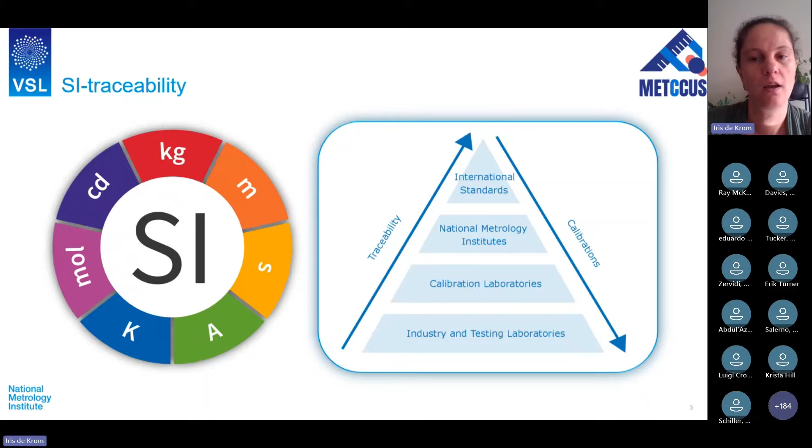And at the moment, for this, I am coordinating the metrology support for carbon capture utilization and storage project, or in short, MET-CCUS project. This project started the 1st of October 2022, and it will run for 3 years. So that means that we're almost halfway through the project.

The project is part of Euramet, and Euramet is the European Regional Metrology Organization, and their tasks are to make sure that national metrology institutes work together in fields such as research, setting up national measurement methods traceable to the international standards, and make sure that measurement standards are known worldwide and also within Europe.

So under Euramet, the MET-CCUS project is a research project where we work together with 21 participants. So different national metrology institutes, but also universities, research institutes, and industry. And in this case, we work together to set up a metrological measurement infrastructure needed for carbon capture or for the CCUS industry.

Before the project started, 4 measurement challenges were selected together with industry. The first one is flow metering. When you want to transport or store CO2, it's very important to know the amounts of CO2 that are sent into storage, and therefore you need very accurate flow measurements, which are currently under development in the project.

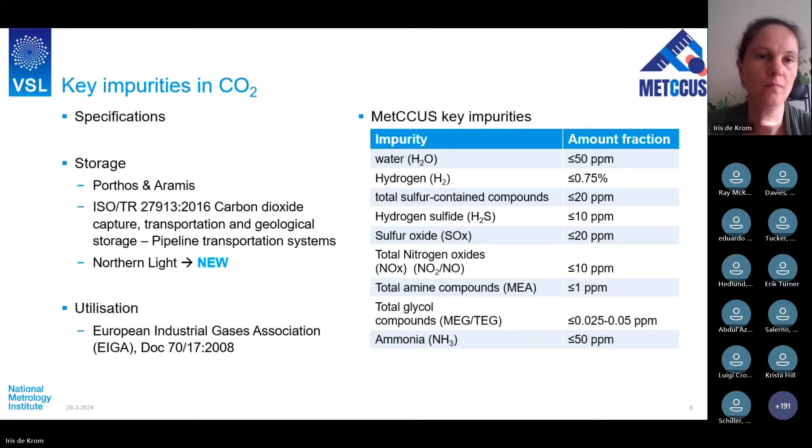So at VSL, we have two different ways to prepare reference materials. We do this by preparing static gas mixtures, which are gas mixtures in high pressure cylinders, containing one or more impurities in CO2 at relevant amount fractions. We also prepare dynamic gas mixtures, made from pure gases or already pre-mixed gases. We mix different streams together to obtain a final gas mixture, which flows through tubing or through a pipeline system.

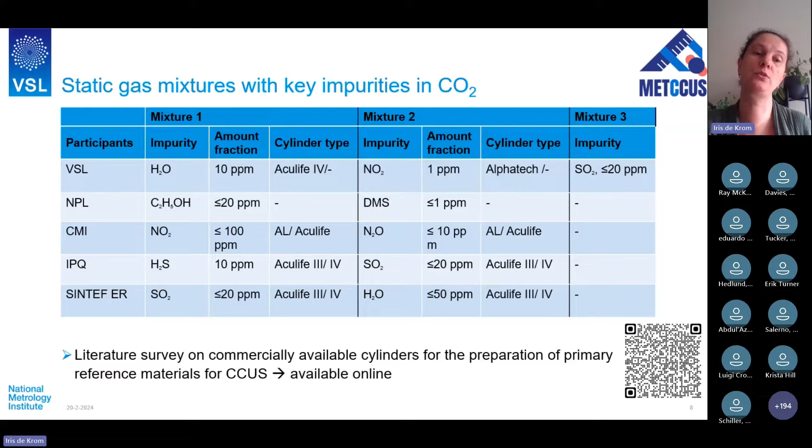Of course, it's not only important to have reference materials of one impurity in CO2, but also of multiple impurities in CO2. These are also prepared in the project by NPL, CMI, and IPQ, who prepare these types of materials in high pressure cylinders.

So they contain the permanent gases - think nitrogen, oxygen, methane, hydrogen, argon, even some CO - and next to that, also reactive impurities such as NO2, N2O, SO2. They're preparing these static gas mixtures and looking at the stability when combining all these impurities in CO2.

At VSL, next to the static gas mixtures I mentioned, we also prepare dynamic gas mixtures. For this, we use thermal mass flow controllers. Here we have a setup with 3 mass flow controllers, and we can connect 3 different gas mixtures to that.

We start with a mix of different permanent gases in CO2, and we mix those gases together, and we can add extra CO2 to dilute it further, or add CO2 with other reactive impurities to obtain different gas mixtures with different compositions, which can be directed to an analyzer or sensor for analysis or calibration of these materials. Currently we are setting up these methods.

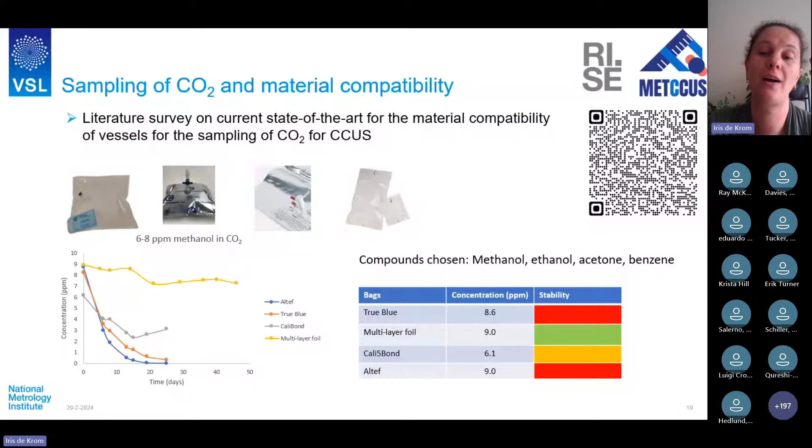Currently we are finalizing these measurements and writing a report about this.

We are developing these type of analysis and also calibration methods for these type of instruments in the project. Next to that, we also develop online analysis methods.

This is done by one of our partners, DFM, the Danish National Metrology Institute. They developed an online method for leak monitoring and CO2 purity monitoring based on photoacoustic spectroscopy. These methods are also very important to make sure that you can follow your CO2 stream online and see what the impurities are before you purify it, after purification, before you send it into storage. So these methods are also under development.

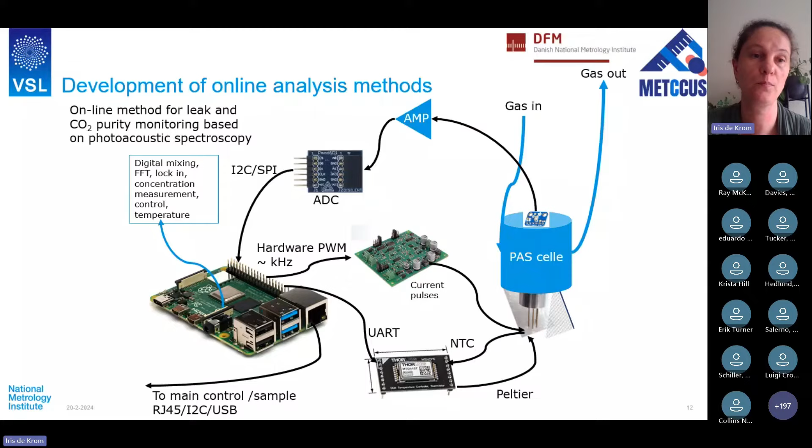So then in conclusion, currently in the MetCCUS project, we are developing primary reference materials with impurities in CO2, which can be used to calibrate offline and online instruments for CO2 composition measurements. We are looking into sampling methods and material compatibility. And as mentioned, we develop these online and offline measurement methods.

So with our results, we write good practice guides, literature reviews, and peer-reviewed articles. This is very important to support the development of documentary standards, specifications, and regulations to ensure safe and efficient operation of CCUS processes, and in the end for the industry to become carbon neutral and to overcome climate change.

So if you're interested to know more about the MetCCUS project, you can follow us online or you can contact me. And if you have any questions, I'm happy to answer them.

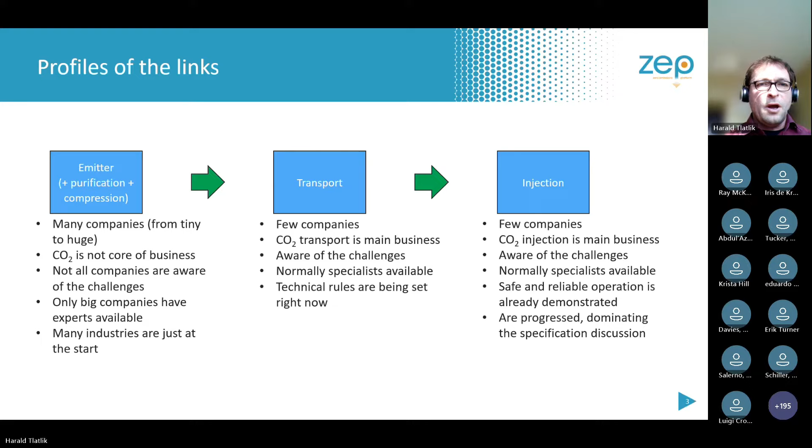What are the challenges and driving forces? Once more, looking at the middle and right box, and on the other side the left box. But the big bracket here is integrity and operability.

All of them need to address that. With operability, I mean, for example, flow assurance—if you have chemical reactions giving you a lot of solid bodies, you have a problem because your pipeline is simply stuck. Integrity is a corrosion problem, for example. It means a little bit different things for all of these boxes, but this is basically asking for a high purity.

But the rest is really different. On the transport and injection side, tendency-wise they want a high purity because that gives less problems, less costs, lower CapEx, lower OpEx. On the injection side, for example, the reservoir will just take a lot more CO2 in the end if you have fewer impurities.

On the other side, on the emitters, we have a lot—it's a lot less defined. It depends really on different industries how they emit their CO2 stream.

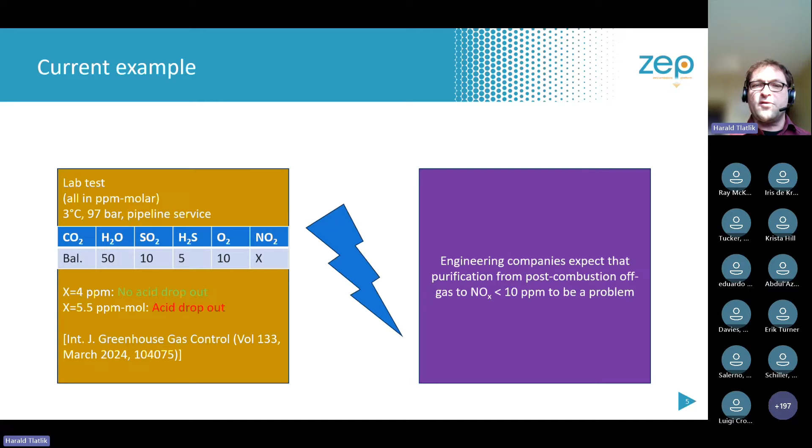Costs for injection and transport are moderate, but for the emitters they are pretty high. To give you a short number on CAPEX: take the Greensand project in Denmark, they want to inject about 100 million tons of CO2 until end of life. The investment would probably be something like 1 billion euros, maybe half of that, maybe 50% plus. If you divide that, you have 10 euros per ton of injected CO2, plus of course the OPEX.

So it gives you the idea. If you could add 100 million euros, for example, to make the whole project more resilient against corrosion or other problems arising from impurities, they would just add 1 euro per ton. On the emitter side, there are no good numbers, but I talked to several parties, and they expect something like 130 to 150 euros per ton of CO2 just for the purification and compression process.

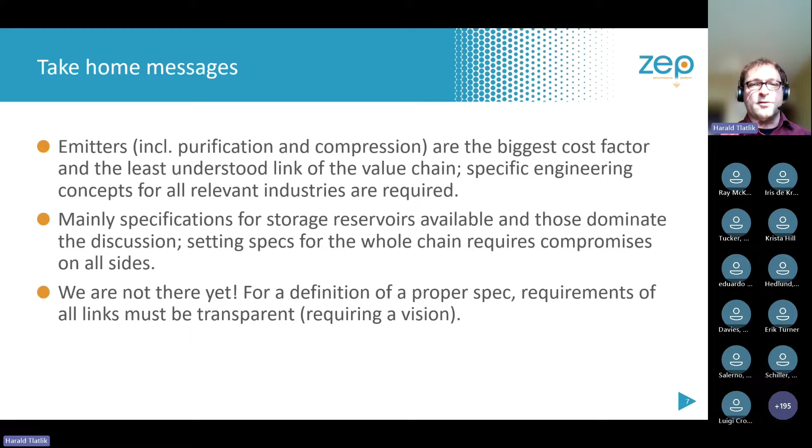I would like to thank you for your time, and if there's time, but I don't think so, I would be open for questions. Otherwise, we do that at the end.

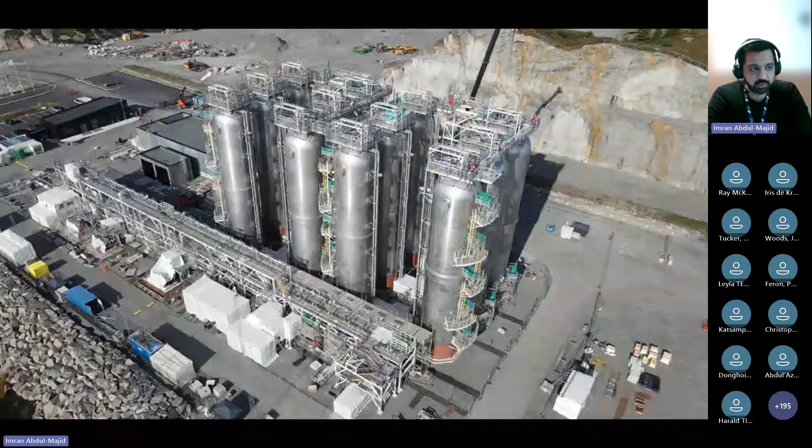However, the project itself was being worked up by Equinor for a few years before that. Sometimes pictures do come a bit short, so I have here a drone video to really show - I hope it's running - it gives you an impression of the plant and its state.

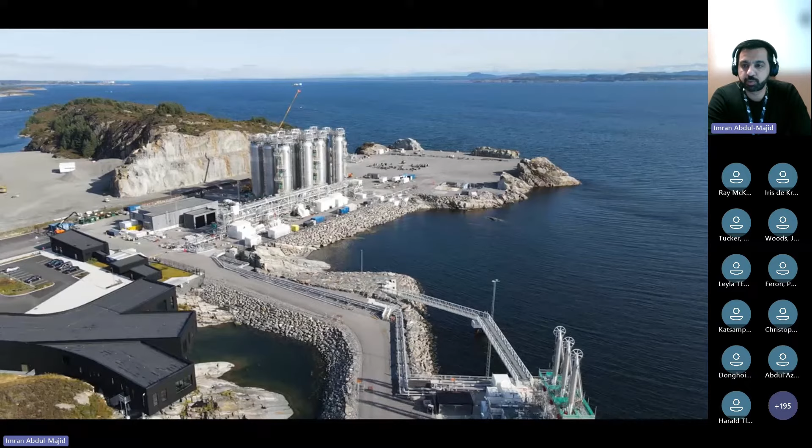We have built an open source, non-discriminatory plant, meaning open source, open vapor return is the design basis. Currently, the plant stands about 98+% completed. A major part of the plant is already commissioned, and we are working toward getting ready for receiving CO2 this year.

Aziz, was the video running?

Yes, it's running. Excellent, good.

I think one of the key things here is that it makes a difference when you try and test things in something that you actually are building. When you have steel in the ground, concrete and bolts, you are able to really assess the impact of what you are doing.

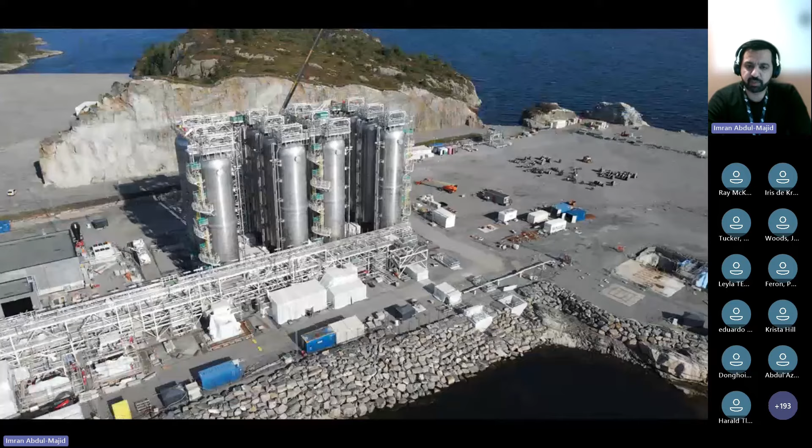When we started the Northern Lights project itself, roughly 8 years ago, the CO2 specification was very different with regards to the sources available, but also the experience available. Since the development of Northern Lights, a lot has happened, and that's why one of the older CO2 specifications needed to be updated. It's important to mention that when Northern Lights issued a new CO2 specification last week, it did not issue a specification for the industry. It issued a specification compatible with the facilities that Northern Lights has built, and that is quite an important distinction.

We have the transport solution, which is based on ships. I wanted to show you a couple of pictures to give you the idea. Our first 2 ships are under construction. They will be leaving dry dock this year, actually next month, and probably arrive in Norway by end of 2024. They are 7,500 cubic meter medium pressure ships, LNG fueled, wind assisted, air lubricated, so we try to make them as low in carbon footprint as possible.

In addition to those 2 ships, 2 additional ships have already been ordered. So ship number 3 and ship number 4 are also ordered, and the same yard will manufacture them. For the ship manufacturing in particular, we have Stasco, the maritime arm of Shell, as our technical service provider. For the plant you saw earlier in the video, our contractor is Equinor. The way we work is basically we contract out packages to owners and other companies to deliver pieces of the value chain.

The storage is located in the EL001 license. What you see on the right-hand side is the western coast of Norway. That's the 110 kilometer long pipeline. We are located just south of the mega Troll gas field, where we receive CO2 from the pipeline. We receive all our umbilical power, control, and hydraulics from an Oseberg A platform, about 40 kilometers southwest from us.

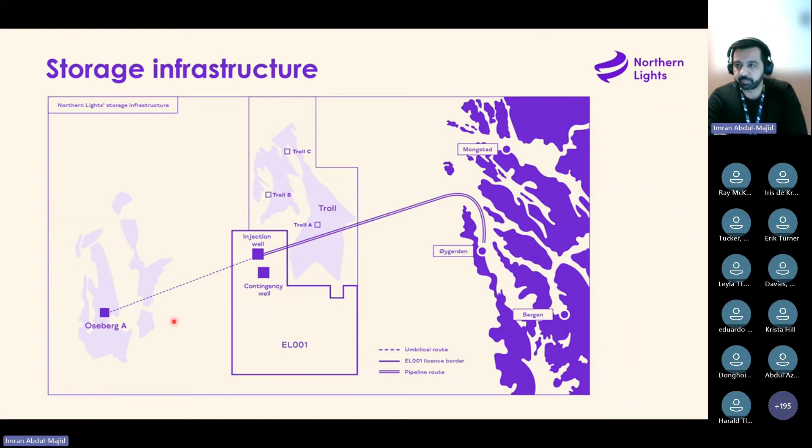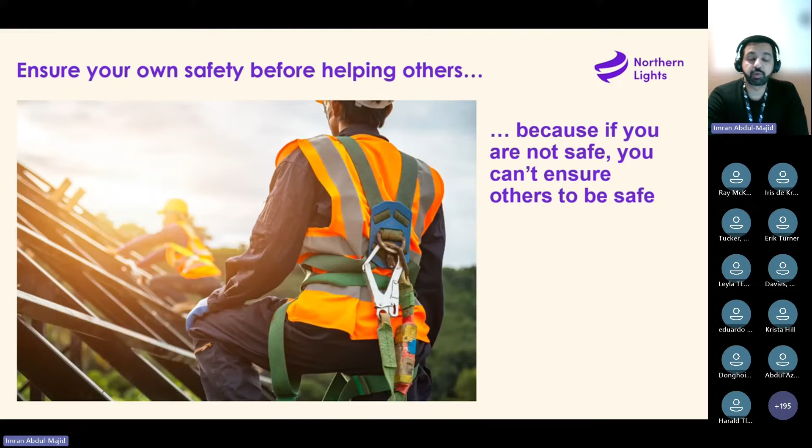You often hear this when you travel in a plane: ensure your own safety before helping others. Put your own oxygen mask on before you help others, because if you are not safe yourself, you're not able to ensure that others can be safer. This is really the mantra behind assessing the CO2 specification that was set 6-7 years ago for our design basis and infrastructure, i.e. Northern Lights. New insight shows that there was work demonstrating that corrosion and corrosive elements of impurities were not adequately handled, simply because at the time the specification was developed, they were not available.

About 12 months ago, we commissioned a CO2 task force and gave the role to DNV to lead it, to keep an independent body. We had interdisciplinary teams from Northern Lights, Equinor, Shell, Total Energies, and DNV participate in that task force, and we covered a significant range of topics.

We opened up the previous specification, which was also built by DNV, contracted by the state when it was first developed 8 years ago. We relooked at risks and operations, HSE, chemistry, thermodynamics, corrosion, material integrity, flow assurance, subsurface considerations in terms of plugging of the reservoir, marine aspects in terms of shipping, off-spec handling, process, and quality analysis. As you can imagine, this is quite a large range of topics that we looked at, with about 75 people who just finished the task force last month.

We actually have a webinar tomorrow on the new CO2 specification. The intention was really to take a critical, hard look at what we have, and then look at work available in the public domain, work conducted in joint industry projects, and work done in our owner companies, pulling it all together for a fresh view of what we have built, or are just about to complete constructing, and whether we have any insight showing that we are not safe. The specification has been developed based on the current built Northern Lights value chain.

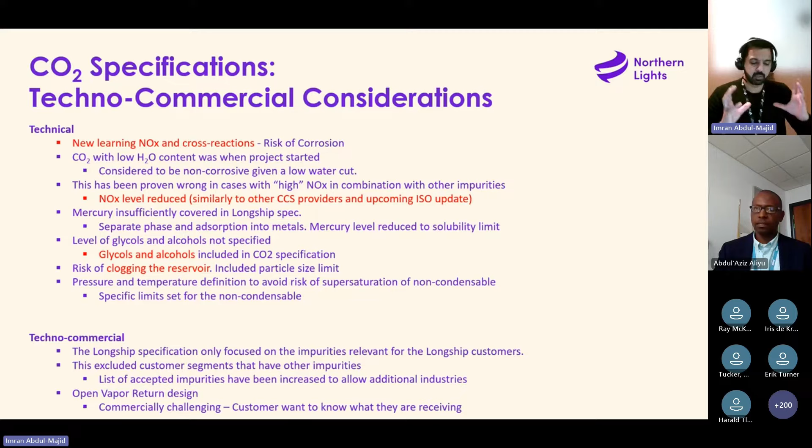These are the high-level technical considerations. Then we have techno-commercial considerations, which look at the previous specification we had. Remember, what we're building right now is a demonstration project, but on the back end of this, we will have a commercial phase.

The demonstration project is based on Longship customers, that's two-state customers. It did not include the segment of customers with other impurities, which is what I mentioned a few moments ago. There was a need to open it up and allow flexibility to host more customers.

We've also designed an open vapor return design, which is yielding a lot of commercial challenges with regards to how you actually handle a specification on both sides of the table. Do you not have a specification for vapor? Is that fair when you've actually built an open vapor return design?

So in the spirit of balancing safety and commercial aspects, there are now three key aspects. This is taken from the publication we did last week on our webpage with the new CO2 specification. We've really included new insight into cross-reaction between existing and new components that lead to the development of corrosive fluids - corrosive fluids being highly dangerous for our integrity. We've relooked at that and set a few limits to make sure we do not develop corrosion. That basically covers part 1 and part 2.

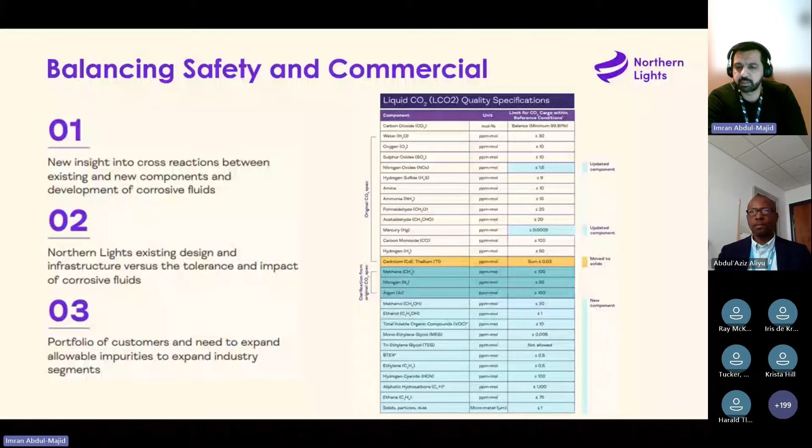On the right-hand side you see the specification table as published. You'll see both the old specification and the components that have been updated, what we moved from the old spec into the new spec, and the new components we added. For me, this is not really tightening it, but making sure the spec is safe, because safety of our people, the plant and asset is paramount.

It's literally no point venturing into this if we do not take on new insight. I wanted to show you this because it's not a piece of work done in isolation. It's work we've focused on the value chain. The beauty of Northern Lights, humbly saying, is that when we develop something we actually have the chance to test it. We have metal, steel and concrete on the ground.

We have a value chain that is almost ready, and a customer portfolio with a significant number of customers spanning a wide range of industry segments. That means we can test these things quite deeply and understand where capex is pressuring, and where operability is pressurizing.

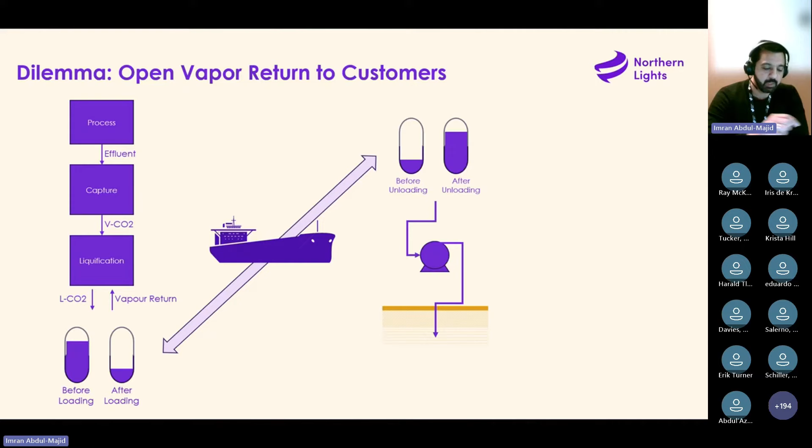And this was really my last slide. I hope I haven't overdone it on time, Aziz.

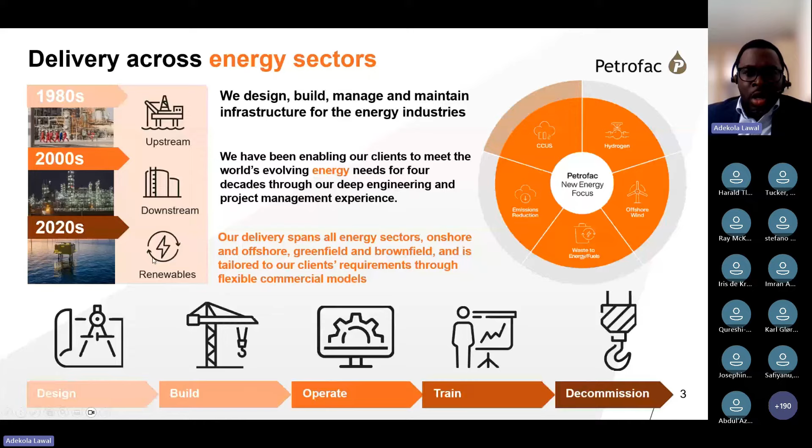One additional unique offering is that, based on our involvement across the entire project lifecycle, we are able to bring perspectives from various stages to early front-end engineering studies, because we are involved across the project lifecycle.

So here are some of the projects that Petrofac is currently delivering in carbon capture, utilization, and storage. The first one I'm going to talk about is an EPC project, which is currently in development in the UAE. Here we are looking to triple ADNOC's installed capacity for carbon capture to 2.3 million tons per annum. The project itself is about 1.5 million tons per annum.

And basically it's a full scope CCUS project. So it's a natural gas processing plant, and we basically separate the CO2 and condition it, transport it, and inject it back into a geological formation.

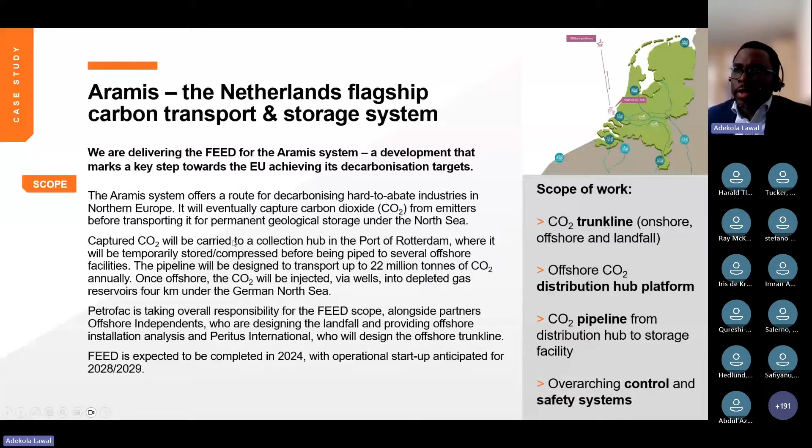The next project I will highlight is a FEED project that we also conducted in Stockholm. This is on a bio cogeneration plant in the Stockholm area, and we have concluded a FEED on this particular CCS project in Sweden.

This would potentially deliver negative emissions of CO2 because it's a biomass cogeneration plant. Once you've combined that with CCS, you have the potential to deliver negative emissions of CO2.

Petrofac's scope of work included the PDP for the capture process, and also the CO2 compression, dehydration, liquefaction, on-site storage, and preparation for onward shipping of the CO2 to the final storage location. So that gives you a flavor of the kind of project that we've been involved in.

I just thought it's helpful to take a step back and look at the CCUS value chain. We have a representation here. We have various approaches for CO2 capture: post-combustion, pre-combustion, oxy-fuel, industrial processes like cement and refineries, direct air capture. These will basically deliver CO2 at different conditions, different pressures, and with different compositions and contaminants, and that's one important factor to take into consideration.

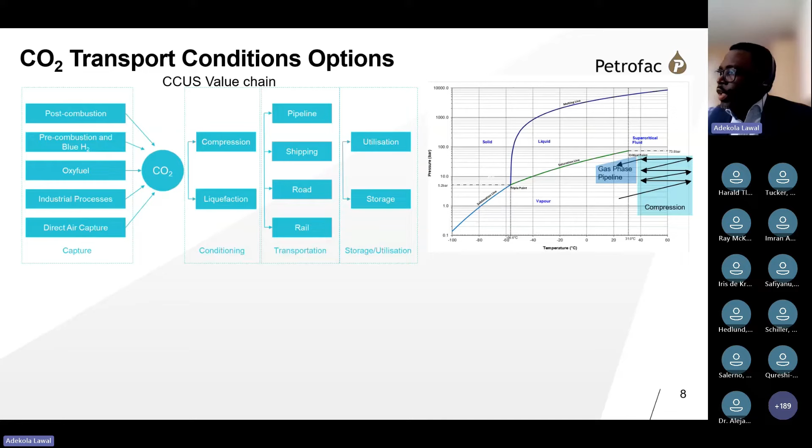So for example, compression, you might have a gas phase pipeline. Why would you want to go for a gas phase pipeline? It's low density, usually larger diameter pipelines for effectively the same mass flow rate of CO2. You might be constrained because you want to reutilize existing facilities like existing pipelines, and you don't have sufficient bandwidth to accommodate high design pressures with some of those pipelines. So that might be one reason why you go for such a gas phase pipeline.

Otherwise, it's typically more efficient cost-wise in terms of the size of the pipeline to transport via dense phase. That just requires additional compression, obviously.

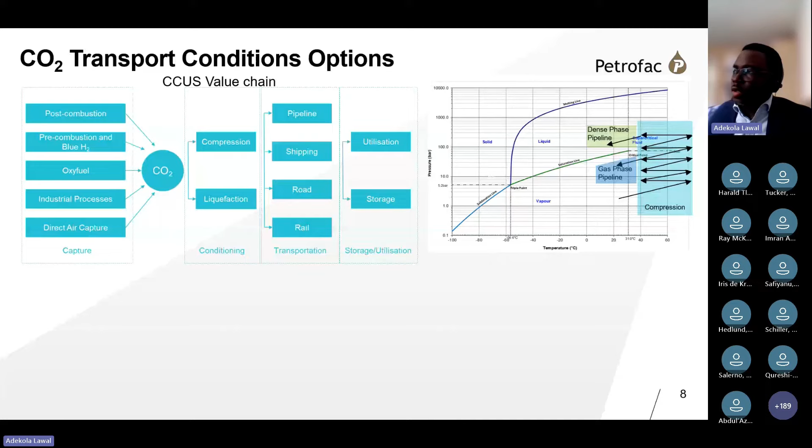Now, the additional conditions that you could transport CO2 in is liquid form, and there are various approaches: high pressure, medium pressure, low pressure. Medium pressure is the typical commercial option, and that's what Northern Lights application is currently using, and what a lot of commercial projects are considering as well. There are some conditions and unique features of each of those options.

As the name implies, there's a trade-off between how much you pressurize the CO2 and what conditions you need to liquefy at. At higher pressure, you don't have to cool the CO2 down to very low temperatures; you can achieve liquefaction at higher temperatures, and vice versa at low pressure. So just to set some context and some background.

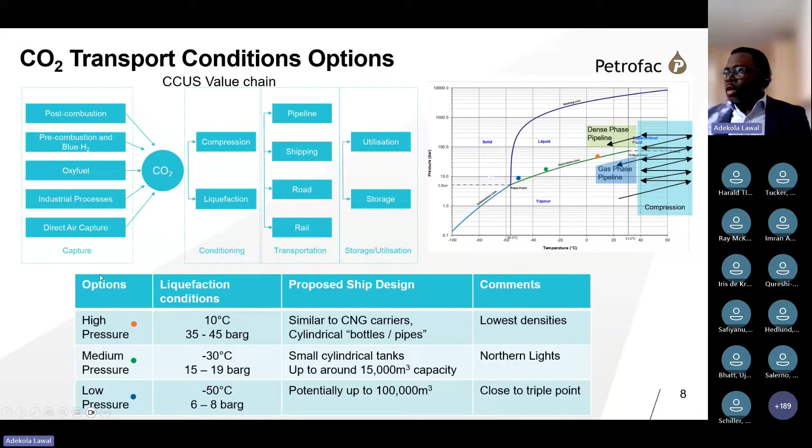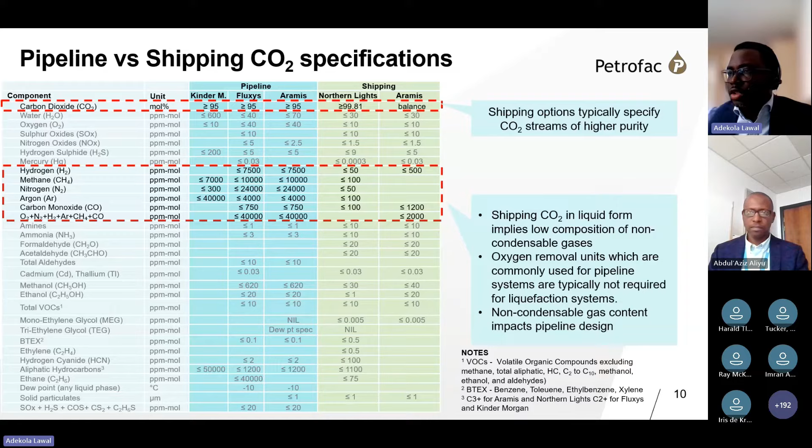Now, specifically on CO2 dehydration and corrosion, a number of speakers have alluded to the fact that corrosion is very important in CO2 transportation. The presence of free water is definitely something that should be avoided at all costs, as free water can lead to extreme corrosion rates, hydrate formation issues, ice formation issues, and the like.

So it's almost standard across the various transportation options that you would have some form of dehydration of your CO2 streams, using technologies like molecular sieves, silica gel, and TEG. It's important to note these achieve different levels of dehydration. Also, TEG itself is one of the impurities with significant or stringent specifications, because it has an impact in increasing the water dew point specifically. That's one point to note about TEG dehydration.

Other key contaminants - and I'm coming to the end of my slide pack - there are a number of additional contaminants that increase the risk of corrosion. Oxygen is one of them. Nitrogen oxides and sulfur oxides also present quite significant risk for increased corrosion.

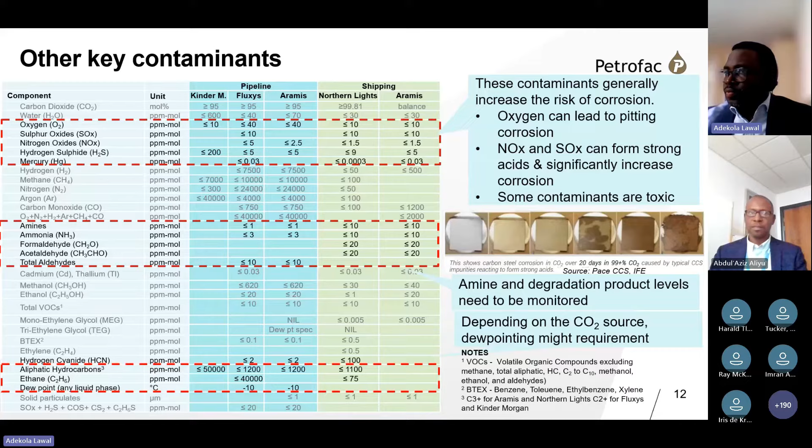So thanks for your time, and yeah, I don't know if you have time for questions.

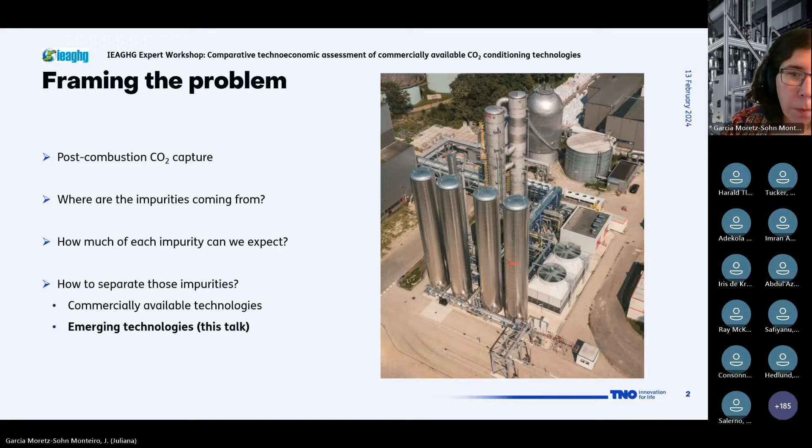There are two campaigns from TCM, Technology Centre Mongstad, that have addressed CO2 quality out of the stripper, and I will refer to these two campaigns here. They were both operated with MEA, so open campaigns with an open solvent and with different flue gas qualities.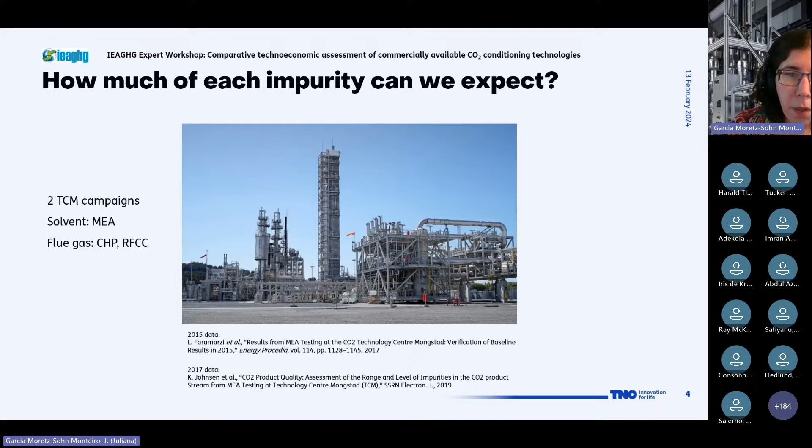What we see from the campaign from 2015 is that there are, for instance, aldehydes in the CO2 product at ppm levels, formaldehyde, acetaldehyde. MEA, the amine itself, was also found, at least 0.03 ppm, and diethylamine, a degradation product of MEA, more at the ppb level. In the 2017 campaign, they extended this test to more components, also looking into oxygen, argon, nitrogen, CO, and NOx, and here we see more components coming through and appearing in this CO2 product.

We're talking about ppm and ppb levels here, and throughout this workshop people have already addressed difficulties with measuring these components. We can imagine that, for instance, for NOx, this is already a challenge, but it's also very important to measure so that you know how to further process the CO2 before it needs to be liquefied or sent to pipeline and so on.

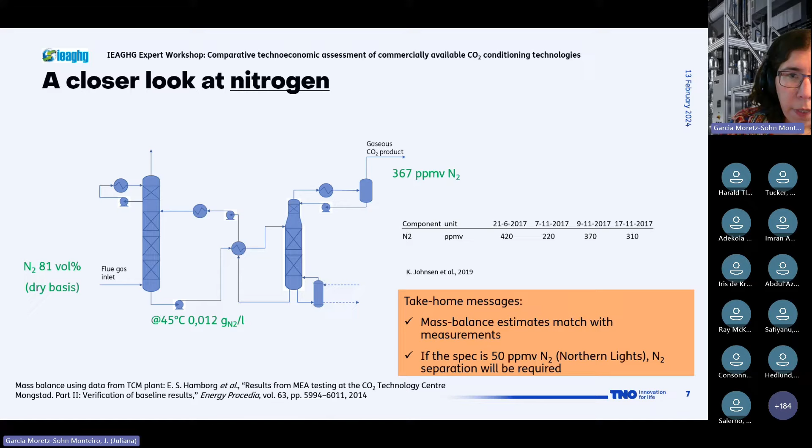With the same line of thinking, we can look at oxygen. If I do the same exercise, I end up with 73 ppm of oxygen in the gaseous CO2 product. I also include argon here, 8.7 ppm, because in the measurements taken at TCM, oxygen and argon are reported as a lump sum. If we take the sum, what I've calculated is around 80, and what is measured is quite below this, like 2 or 3 times lower than what I actually estimate with this mass balance.

But this is actually expected because, contrary to nitrogen, oxygen is not inert in the solvent matrix. It is known that oxygen reacts with the solvent and forms oxidative degradation products that we were talking about, like ammonia, aldehydes, ketones, and so on.

At TNO, we're busy doing measurements of how fast oxygen reacts with solvents at different temperatures, different CO2 loadings, and so on. Using those measurements for MEA, I come to a certain expectation of how much oxygen would be consumed in my plant. If I do so, I end up with 0.68 ppm of oxygen in the gaseous CO2 product.

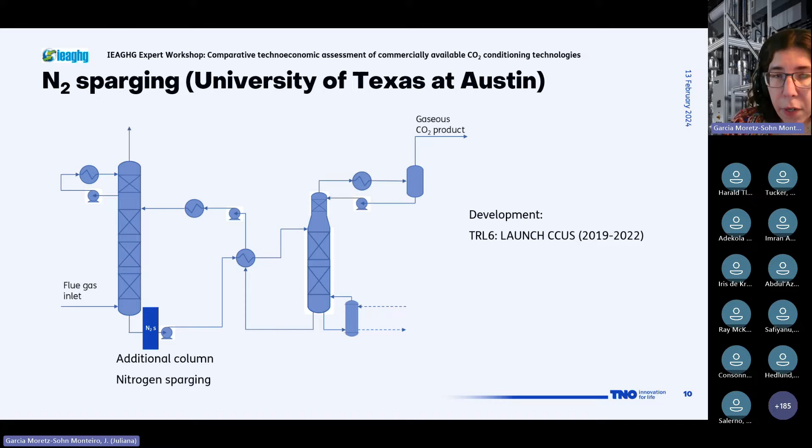They have demonstrated in their pilot at the University of Texas that up to 90% removal can be performed. Gary's group also worked out, for a feed study, the design of a full-scale plant for 460 megawatts of a natural gas-fired power plant, and worked out the economics of the solution, coming to a cost of around $0.25 per ton of CO2 for having this nitrogen sparging column, with most of the costs coming from having the nitrogen plant in there. So this is, I would think, not a very major cost, and if we factor in the advantages of lower degradation, then this sounds quite reasonable.

The technology that we at TNO are working on is slightly different. It's called DORA. The thinking is the same, so we also want to separate out the oxygen in the rich solvent line, but instead of with a column, we do that with a membrane contactor. On one side of this membrane contactor, our solvent is flowing through, and on the other side, we use a combination of vacuum and nitrogen or CO2.

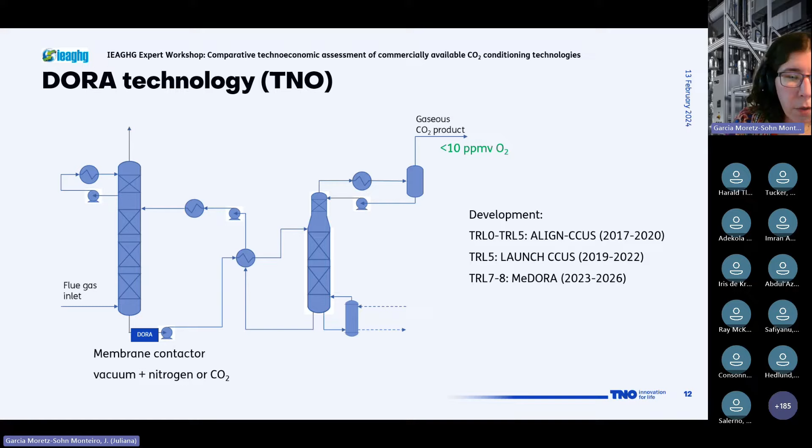By designing it as a membrane contactor, we can definitely lower the amount of sweeping gas, the nitrogen that is used. And by doing that, we can also lower the costs. So this is a technology that is currently under development.

We have already demonstrated up to 90% removal at TRL 5. This is a skid that is installed in an incineration plant here in the Netherlands. In preliminary comparison to nitrogen sparging, we see possibility to lower the capex and opex, but also not only separate oxygen, but also nitrogen.

So the take-home message is that both DORA and nitrogen sparging are effective in separating oxygen, with more than 90% removal demonstrated. With these technologies, we can also separate other trace gases from the amine stream, like ammonia, NOx, and so on, increasing the CO2 quality from that perspective. The costs are expected to be in the range of 25 cents per ton of CO2 or lower, and the environmental impacts need to be further quantified.

This is the objective of the MeDORA project that we're currently running. It started last year and will run for 3 years. We will demonstrate the DORA technology in 3 different pilots with 3 different solvents, at 20,000 hours of operation in total for the technology.

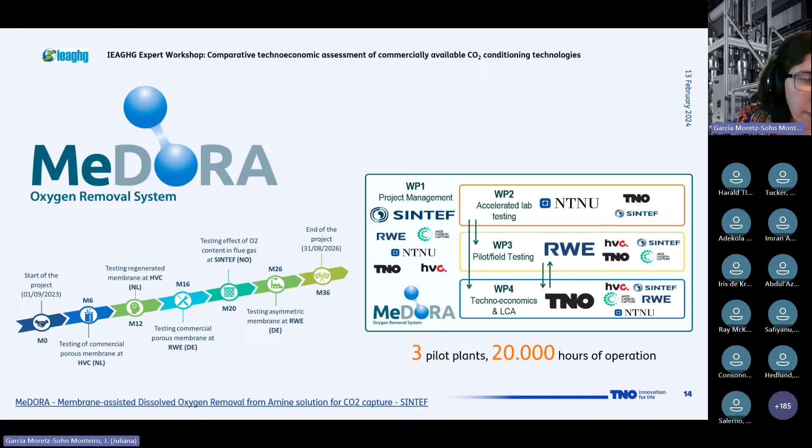With that, I would like to thank you all for your attention. I guess there's no time for questions, but we'll have that at the end of the session.

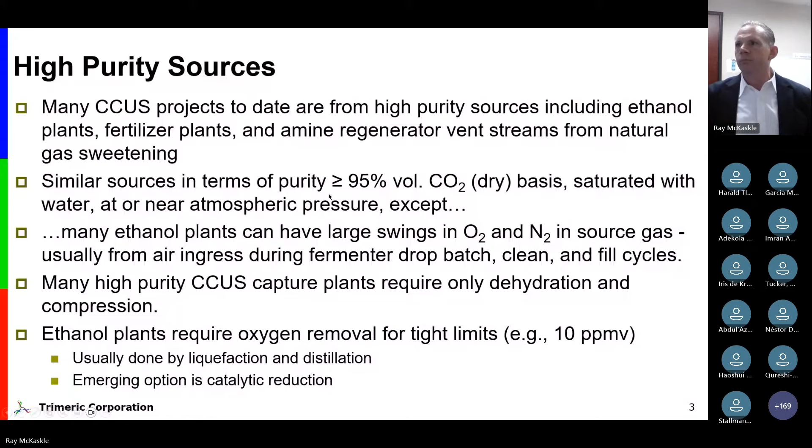While a lot of high purity capture plants can get by with only dehydration and compression, ethanol plants typically require either liquefaction and distillation, or some other way to get the oxygen down below a tight limit like 10 ppm. This is an example of a project Trimeric did about a decade ago at Coffeyville, Kansas,

where there's a pet coke gasifier that uses Selexol to clean up the syngas. It removes the H2S first, and then the CO2 that was previously vented to the atmosphere. We put in this facility that had about 20,000 horsepower, or 15 megawatts, of compression equipment: 4,000 horsepower reciprocating compressors, fed first by two 1,500 horsepower each multi-stage centrifugal blowers.

A lot of people would wonder why we didn't use a single integral gear centrifugal compressor for this project. It would be another good candidate, but the delivery time was over twice as long, and that was not acceptable to the customer. The oil field had to run at half of the injection rate for the first year, which is difficult to do without recycle in a centrifugal compressor. And if you just have one machine, those centrifugal compressors are highly reliable, but the customer wanted to have multiple pieces of equipment for redundancy.

Another source of CO2 is from hydrogen, from steam methane reforming and similar hydrogen manufacturing processes. What I want to highlight about this slide is that it depends on where you capture the CO2. At the furnace, the steam methane reformer furnace, you can get 100% of the CO2 generated in the process, but by then it's diluted down to about 14 volume percent, and it's at atmospheric pressure.

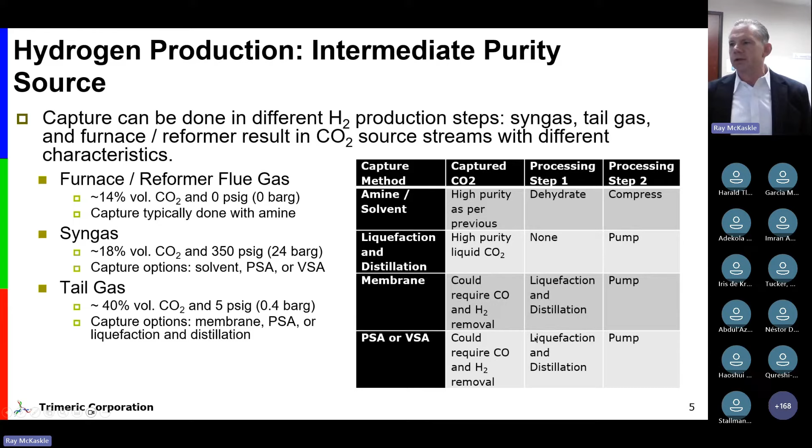When you get into flue gas, it's a lot tougher. Now you're dealing with maybe 10% CO2 instead of 95% CO2. A lot of these power plants run on intermittent cycles like peak loading or curtailment when the power load is low, and that's very problematic for a lot of capture technologies. As the fuel gets heavier, the particulates, the sulfur dioxide, the NOx, all of that gets worse, but the concentration of the CO2 gets higher. So even though it's a lot more challenging to do capture, there's still interest building for these hard to abate sectors.

Most often the flue gas is too hot for capture technology, so a direct contact cooler is used to cool the gas down. A lot of times they add caustic to the solution, which helps reduce any residual SO2 that's there. And sometimes they'll do a rotary gas-to-gas heat exchanger to try to do some heat integration and reduce the cooling water requirements in the DCC.

Before we move on to capture, I just want to emphasize that anything you can do upstream in the generating facility to purify the flue gas is very helpful to the CO2 capture process. So preventing air in-leakage or ingress at ethanol and power plants is a key thing. And power plants that are typically looking at capture have a lot of pollution control equipment already. They could be doing additives for mercury control upstream of the boiler. There's usually NOx control with selective catalytic reduction and/or SNCR, selective non-catalytic reduction.

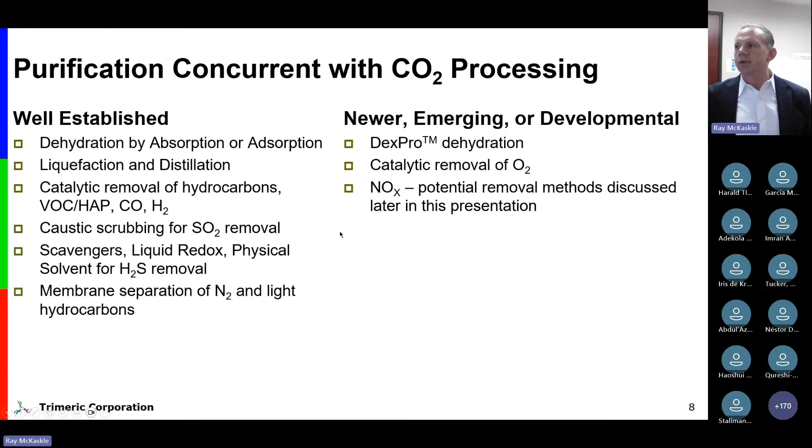So purification that's done after capture, concurrent with the CO2 processing - we're going to talk about some well-established technologies: dehydration, liquefaction and distillation, some catalytic removal of hydrocarbons. We'll talk about the idea of trying to use that to reduce oxygen. Caustic scrubbing, we'll have one slide on that. We'll touch on the different levels of H2S removal that you might consider, membrane separations for nitrogen and light hydrocarbons, and we'll talk about some newer things like DexPro, which is a Joule-Thomson CO2 recycle refrigeration dehydration technology, the catalytic removal of oxygen, and then talk about NOx. What's out there? What are we going to do about that?

And then this is an example of a plant Trimeric was hired to help that had some original design differences than we would have chosen. So they had a carbon steel tube sheet on the heat exchanger in a condensing CO2 service. And so we replaced this heat exchanger with all stainless steel for all of the wetted parts of the heat exchanger. So it's important to get the CO2 dry.

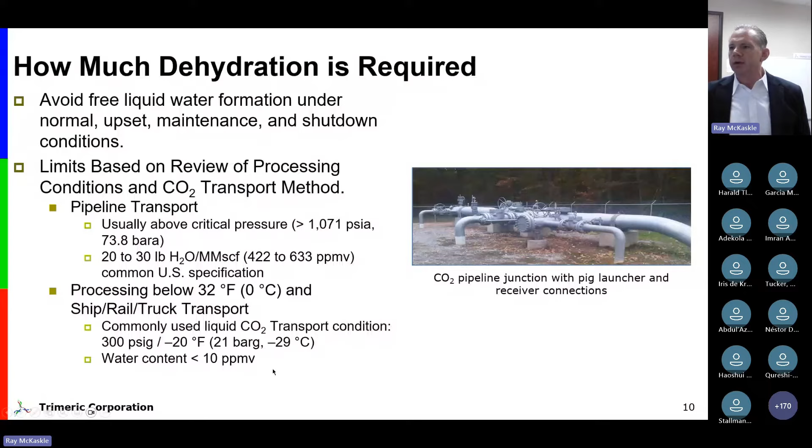And then the question is, how dry do you need it to be? In the pipeline in the US, again, as Wayne pointed out, it's mostly naturally occurring CO2 without a lot of other post-combustion impurities. So 400 to 600 ppm is a specification limit, but the dehydration equipment typically runs much better than that, somewhere around 150 to 200 parts per million by volume. But if you're going to transport liquid, then you have to dehydrate the CO2 to bone dry conditions, usually less than 10 ppm by volume, sometimes as low as 1 ppm, depending on how good your adsorbent system is working. This is an example of a pipeline from one of our EOR customers where it comes up above the ground.

Here's a comparison of the dehydration technologies and roughly how effective they are. And so just by cooling and compression with air or cooling water, you can get it to 50, maybe 40 pounds per million standard cubic feet. The Dexpro process is limited to about 30 pounds per million because of that hydrate condition. They can do methanol injection to get a little bit drier than that, but that's a practical limit with that approach.

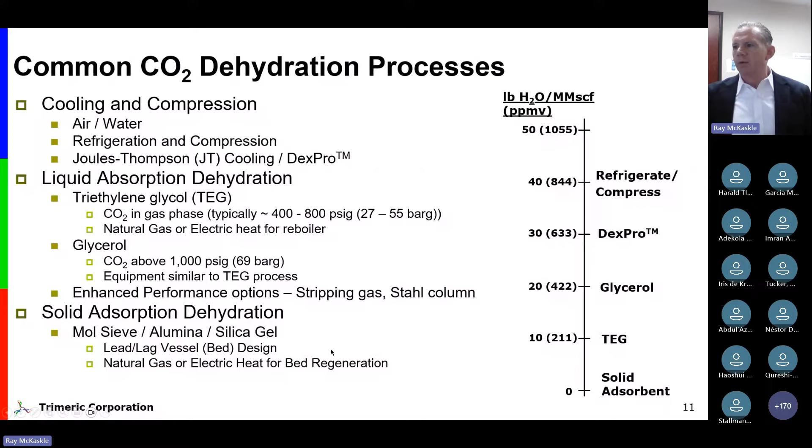So it usually works where you're blending into a pipeline where other sources of CO2 that are drier than that are already present. Glycerol is used when you're above the critical pressure for CO2, where the triethylene glycol would be too volatile and you'd have too much losses of TEG into the CO2. Otherwise, it's fairly similar. There's some tricks you can do to improve the performance of these absorption units, but they're not very common in the field. And what is common, if you really need it dry, is to use dry beds, mol sieve alumina silica gel with lead lag vessel design. You have choices about where you put your heat in, whether it's electric or natural gas.

This is a project that Trimeric worked on at the ADM facility in Decatur, Illinois. It was the first project that captured CO2 from an ethanol plant for an underground storage test. We injected 1 million tons over 3 years from 2012 to 2014. This unit cost about $600,000 purchased equipment cost, and it ran about 170 ppm on average over the 3 years of data that Trimeric was monitoring the system.

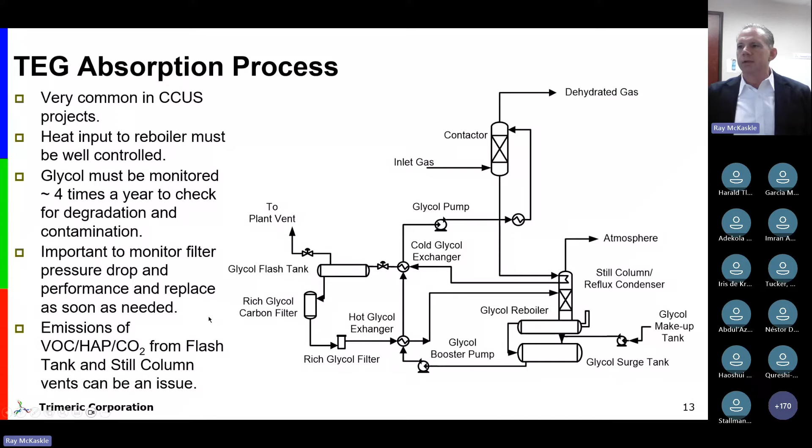It's also important to keep your glycol clean and keep your filters in good condition. Now, the dry beds are fairly simple.

You have some drying beds, the gas flows down and becomes dry, and then you're heating another bed or more to liberate the water. That regeneration gas can be recycled back to the inlet, or in some cases, it can be vented to the atmosphere.

This is more expensive, maybe 1.5 times the cost of the absorption units. So you wouldn't do this unless you had to, but if you have to, it's fairly reliable.

One thing it's important to do is to make sure you keep any liquids out of the drying beds, or it will damage the media. So we often have a superheater exchanger before this to heat up the gas by 10 degrees Fahrenheit or so to prevent any condensation.

Impacts of oxygen - this has been touched on a little bit earlier, but it makes a mixture of CO2 and water much more corrosive. The 10 ppm limit in West Texas, I've been told by operators out there, was a compromise. In fact, they don't want any oxygen.

Because they're circulating that fluid over and over again. Other issues - you can have biological growth in the formation, you can oxidize your dehydrating solution, and you can have subsurface reactions with H2S to form solids, which of course could be problematic.

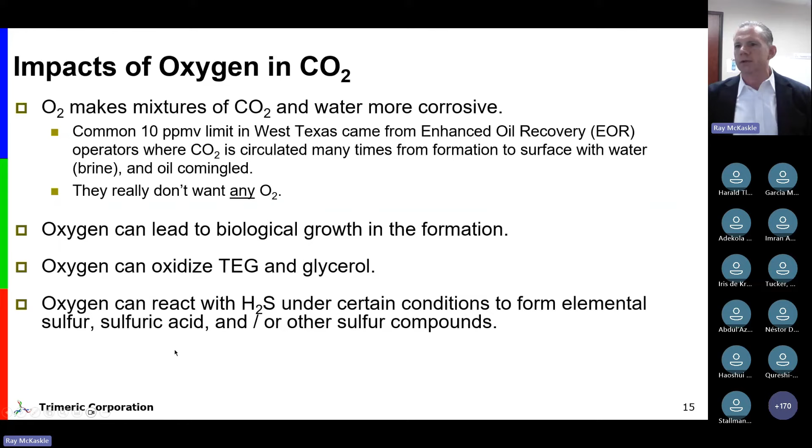The tubes were plugging up every time they started a new run because they hadn't dried the CO2 first. So we had to have them replumb to take the CO2 after it had been dehydrated.

But you're basically liquefying all the CO2, pumping it to a distillation tower where nitrogen, hydrogen, CO, things like that will go out the top, and you'll have a very pure product coming out the bottom. This is how beverage grade plants work, with a few more purification steps.

So the emerging option that we're hearing a lot about is using a catalyst. You need some water for the reaction to take place. You have to add fuel. You have to heat it up to very high temperatures compared to other CO2 processes, somewhere around 700 degrees Fahrenheit.

You have to think about the fouling potential of the catalyst because the catalyst is very expensive. And you have to think about how you're going to spare that and replace it.

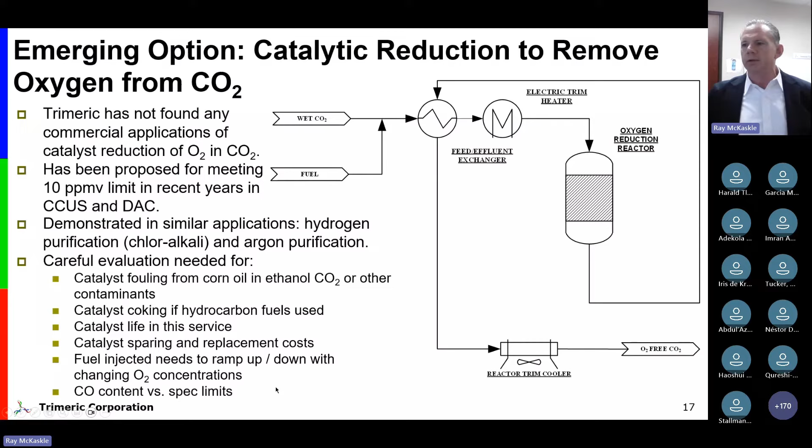And if your oxygen level's changing, you're going to have to be able to change the fuel feed rate as well. Otherwise, unless it's hydrogen, you're going to make CO. So you have to be looking at your carbon monoxide limit versus the specs.

If you're dealing with VOC, which doesn't come up that often in CCUS, but it does a lot on enhanced oil recovery, again, where they're circulating those fluids, you can use things like oxidation catalyst, which is done in beverage grade plants, or low temperature separation plants, which condense the CO2 and let the lighter hydrocarbons go overhead.

You can use extractive distillation for problems like ethane and hydrogen sulfide that have similar boiling points to CO2.

You can also use membranes. This is for an upstream natural gas sweetening application where it's going to remove nitrogen. Also, it can recover natural gas liquids.

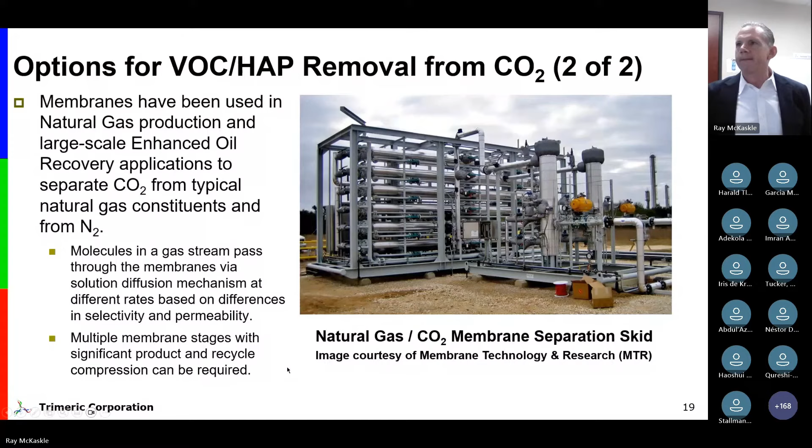This probably has limits. If you feed it too much SO2, you're going to have very high caustic consumption and wastewater disposal issues. H2S, we all know, is toxic and corrosive.

There's a lot of factors in choosing your H2S technology. Primarily the sulfur loading - how many pounds of sulfur a day is what you really have to think about.

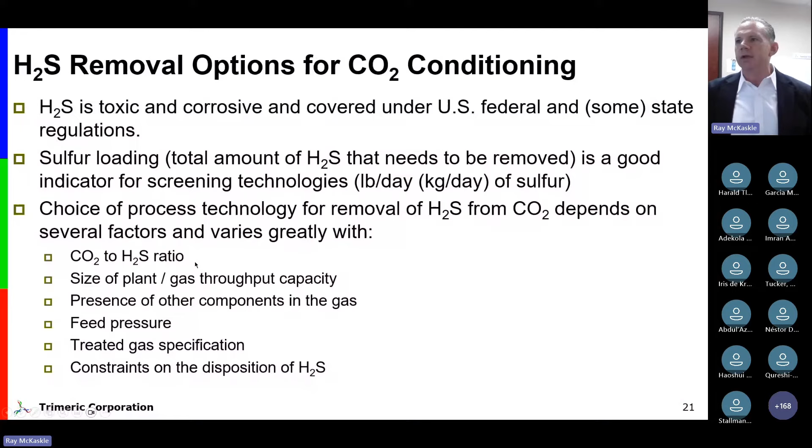If you're lucky and you don't have too much H2S loading, you can use scavenger beds, which have to be replaced. But if your sulfur loading is too high, you might be forced to do a liquid redox reaction like SulFerox or LO CAT, or Stretford.

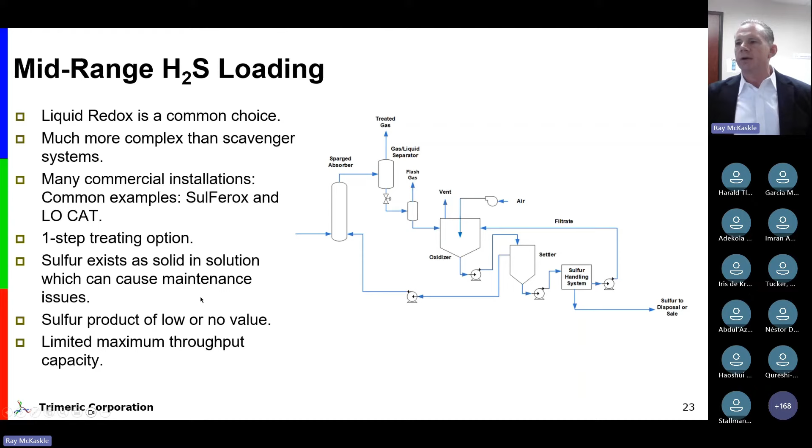These are very touchy processes. You have to have people that are well-trained, equipment in top shape, carefully monitored to avoid problematic issues like foaming.

If you have a lot of H2S, then you're going to have to do something else like amines, physical solvents, special types of distillation. You're going to have a rich H2S gas stream that you've got to do something with. You might be able to do acid gas reinjection, or maybe you'll have to do something like a Claus plant.

So NOx, the elephant in the room. This is a post-combustion product in most cases. It's a criteria pollutant. NO and NO2 are toxic, corrosive. They're very different gases. As has been mentioned earlier on transportation pipelines, there's been some experiments that have shown that even less than 10 parts per million or even less than 5 parts per million of NOx can lead to some corrosion issues, especially if there's SO2 or sulfur oxides present as well.

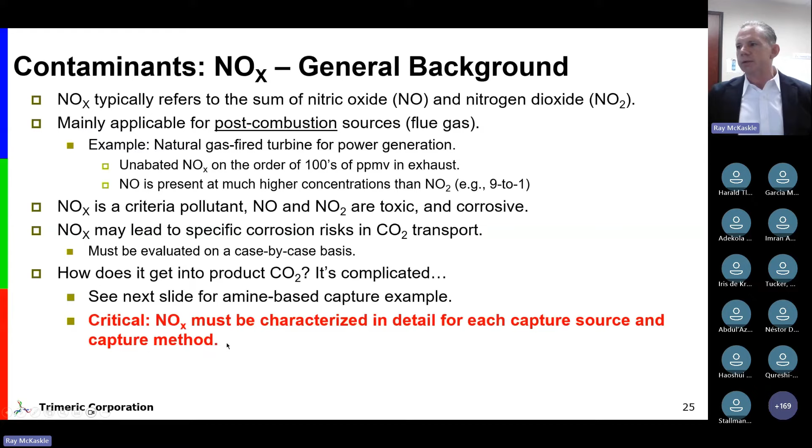So you've got to carefully characterize what's in the flue gas and what is happening to it in the capture method. This is a typical example. If you've got NOx in the flue gas, the NO2 is going to react with the amine. It might make nitrosamines or heat stable salts, which chew up the amine. It has to be replaced. NO is less soluble and probably will end up in the CO2. But once you get that NO2 here in the absorber, then you have to wonder how much of it is going to get stripped out with the CO2 that didn't react with the amine, and also what's going to happen to it later when compression and cooling cycles go.

So for NOx management before capture, you can try to manipulate the combustion conditions to cool the flame and reduce NOx. You can use selective catalytic reduction, selective non-catalytic reduction, or a combination of the two. This is a very hot process, 400C, 700F minimum, and that's a lot hotter than we typically process CO2. So if you're going to try to do that, you need some oxygen for that reaction. So then you're going to have to get rid of that oxygen afterwards.

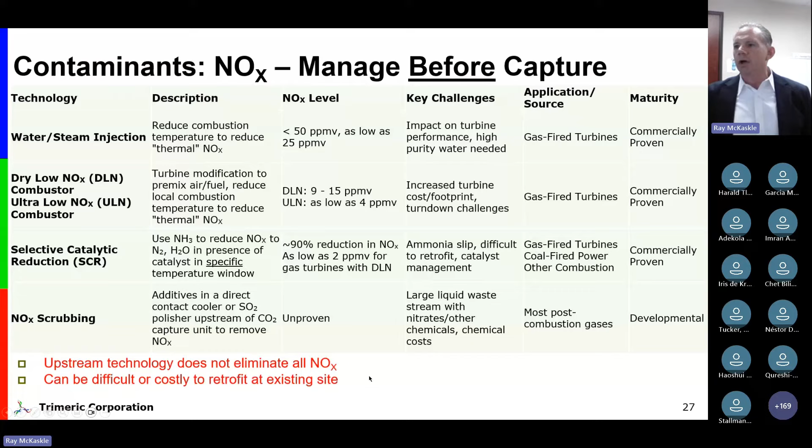You can try to scrub NOx, and people are looking at this. It would be ideal to catch it in the direct contact cooler, but this is not proven yet. So you're also going to have to think about how to dispose of the waste stream that the nitrates are in. And retrofits at these power plants can be very difficult.

Once you've captured the CO2, you can try to use some distillation. NO is lighter than CO2, so it would go out the top of a column. You would have to have a different column for NO2, which is heavier than CO2. So CO2 would go out the top of the column, but you might have to vaporize all the CO2, which is energy intensive. You can use some liquid CO2 to scrub NO2, but then you're going to have a liquid CO2 waste stream. You're going to lose some of the CO2 that you're trying to capture.

People are looking at how much can be reduced in compression and cooling cycles. There have been some claims out there, but we haven't seen any data. And so there's a lot of technologies that are being discussed in the marketplace today: Air Liquide, Cryocap, Topsoe, SNOx, but we're not aware of any of these actually being deployed in the field in CCUS to date. There may be some out there, but we at the group of Trimeric don't know about it just yet.

There's some other things that you need to keep an eye out for. There's corn oil and other impurities in ethanol plant CO2. This was a pump impeller for liquid CO2 that it smelled like sulfur when they collected a sample of this. You can have compressor oil carryover, especially if you're using reciprocating compressors that use cylinder lubrication oil. You can have glycol carryover from your TEG unit.

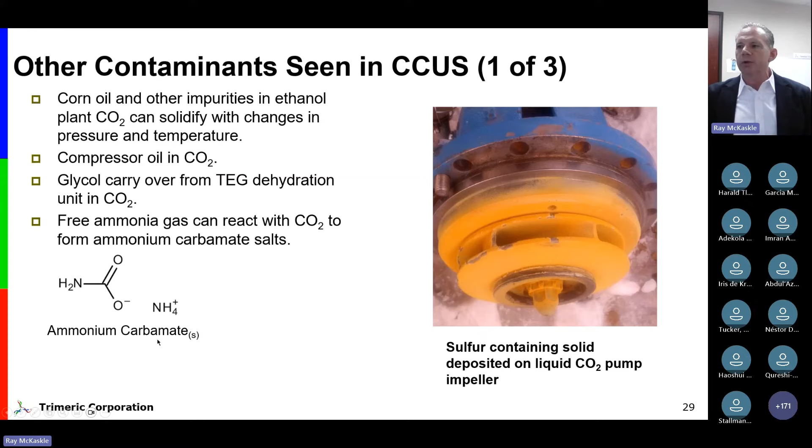If you have any free ammonia from SCR operations, it will react with a lot of things, including CO2, also sulfur, chlorides, and things of that nature. So you can have salts build up where you don't want them, and these are typically very fine particulates that are hard to capture in things like a packed bed scrubber.

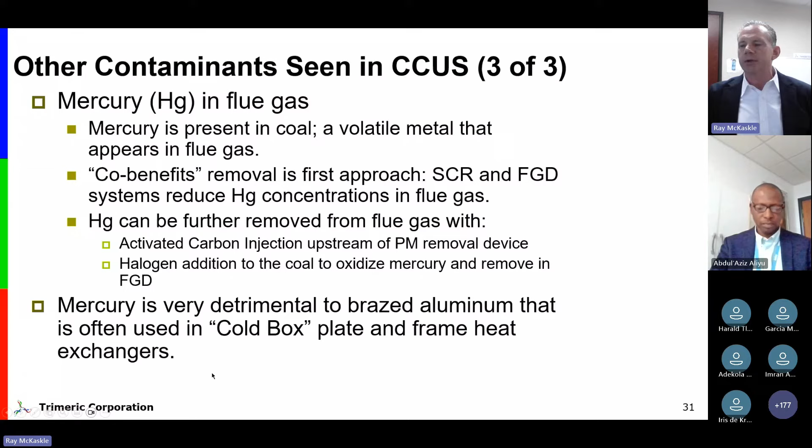Mercury is another thing that's present in coal. If you can get it out of the plant before it gets to the CO2, you're better off. Mercury will destroy brazed aluminum in a cold box heat exchanger, which is common in some CO2 capture processes. So there's a lot to look out for, guys.

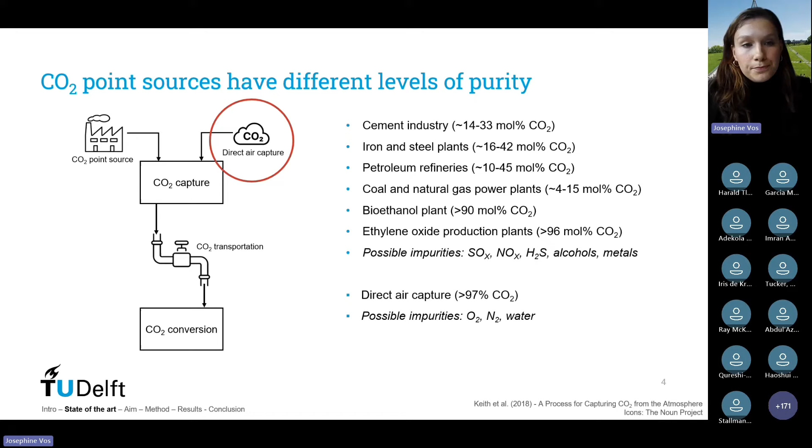Now, if we look at different carbon capture and utilization technologies, they can actually handle different levels of impurity. For instance, mineralization can handle flue gas directly, and biological conversion can handle up to percentage level of impurities. Whereas thermocatalytic hydrogenation, for instance, requires already a ppm level of sulfur components in order not to damage the catalyst.

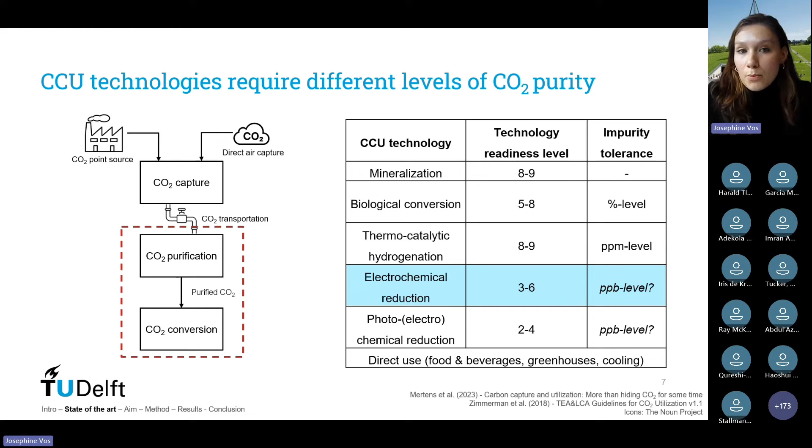But what about the technologies currently at a lower technology readiness level? In this project, we focused on electrochemical conversion, so CO2 electrolysis, which is currently at a TRL of 3 to 6. There's not a lot yet known about what impurities this can handle, since it's currently being tested in the lab. What we can see already is that trace level impurities are known to affect electrolyzer performance. For instance, NOx reduces the selectivity of the CO2 conversion step to the desired product. SO2 reduces the CO2 conversion efficiency, and traces of sulfur or metals can irreversibly damage the catalyst. We also noticed that there are differences in electrolyzer design.

You have, for instance, high temperature electrolysis and low temperature electrolysis. We're also not sure what the differences are in terms of impurity tolerance for these two, and also different catalysts can affect the impurity level.

While researching, I started from the point of CO2 electrolysis and looked at the current literature on this technology. Since it's a low TRL technology, most works are experimental studies focused on lab scale in order to understand the technology better. On the other hand, you have initial techno-economic assessments, which use lab scale data to create process models to estimate the future commercial scale performance and cost performance of a CO2 electrolysis plant.

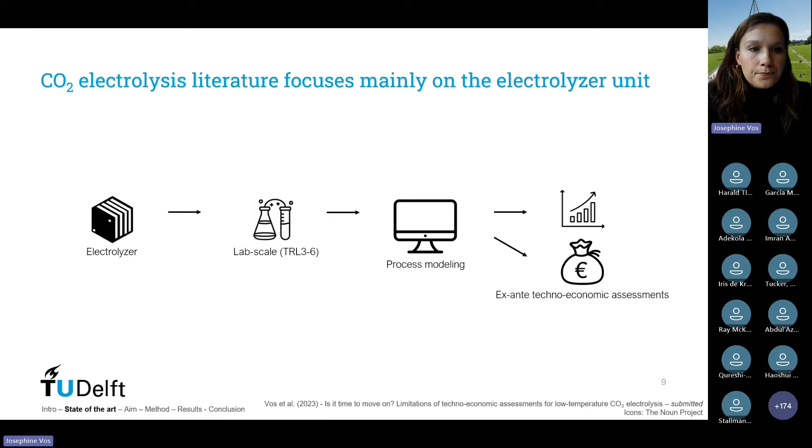While looking at these techno-economic assessments, I noticed there wasn't a lot of attention yet for CO2 purification. Common assumptions were that CO2 will be captured from a point source or from DAC, but most of all, they just consider it readily available at the plant gate in a pure or highly concentrated form. Also, the starting composition of CO2 is often not yet reported, it's just explained that pure CO2 will be available for the CO2 conversion process, and no CO2 purification units are included.

So after your CO2 has been transported to your plant, there's the CO2 purification step before it goes into the electrolyzer. If we look at the cost assumptions, most studies assume that CO2 cost will lie around 0 to 70 euros per ton of CO2, but it's unclear what is actually included in that cost.

Is this just the capture cost? Are they also including transport cost? Does it already include the CO2 purification process that is perhaps needed? The reason I find this important is because most techno-economic assessments conclude that the CO2 cost has a large effect on the overall operational expenditure of a CO2 electrolysis plant, and therefore it's quite important to know what this cost entails.

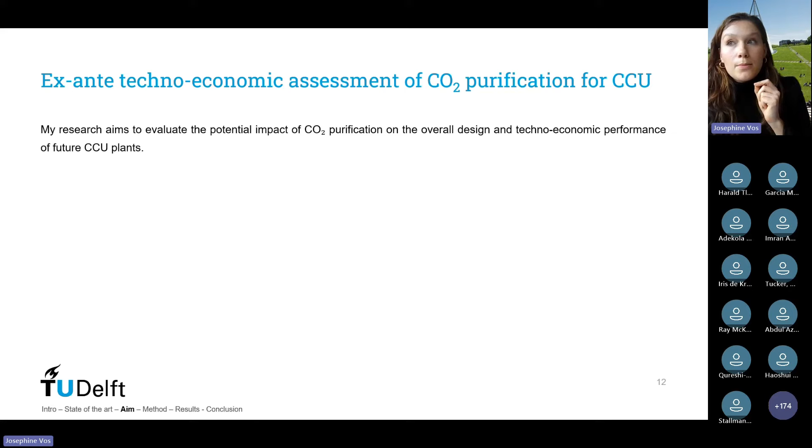The aim of my research is to perform a techno-economic assessment for a CCU process, and specifically for my case, I'm looking at high temperature co-electrolysis of CO2 and steam. What we selected as a source is a bioethanol plant, and we're producing syngas.

My plant is going to be run in a continuous mode, so connected to the grid, and I'm estimating for an nth-of-a-kind plant, located in Northwestern Europe in 2019, at a scale of 40 kiloton of purified CO2 per year.

The scale choice is something I quickly want to highlight. We chose this scale to be able to represent a small bioethanol plant that we could find in Europe, and at the same time compare it to the current scale available for direct air capture plants, while staying in a realistic scale for high temperature solid oxide electrolyzers, which is currently between 2 and 9 megawatts, which is what we estimate could be realistic.

I'm using conceptual process design as my methodology for the CO2 purification train. As a first step, I looked into the CO2 feed composition, really looking at the major but also the trace components that could potentially affect the electrolyzer, and tried to match that with the contamination limits for CO2 electrolyzers.

Based on this match, I then looked at different types of cleaning units in order to develop a block flow diagram. Later I modeled this block flow diagram using Aspen Plus simulation software to create a process flow diagram. After that, I performed validation steps, optimization and assessment of techno-economic performance, and uncertainty analysis, which is currently still in an iterative mode.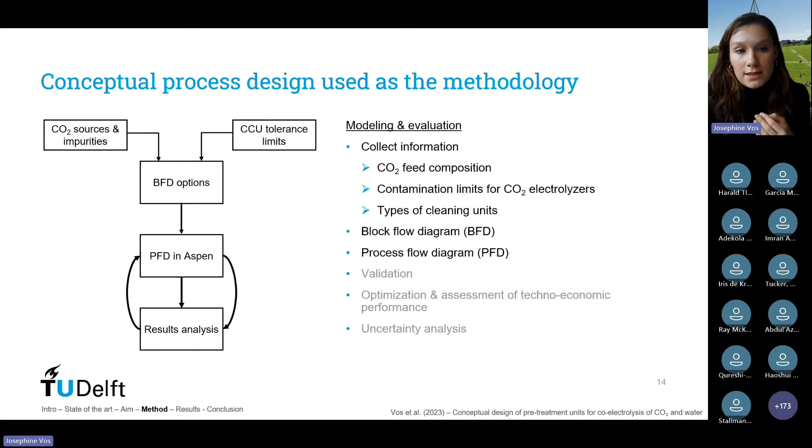So now onto the results. While investigating the major and trace components in biogenic CO2, I decided to consider this first list in order to match it with the tolerable amount for my CO2 electrolyzer.

What I found is that, for instance, you have different types of sulfur components which could potentially be damaging to the electrolyzer. I also found that heavy metals were a no-go for the electrolyzer unit. There were no heavy metals in the bioethanol plant data I found so far, so those were not further treated. Also, chlorine could potentially be poisonous for the high temperature electrolyzer.

Another thing that was found was that the bioethanol plant can also contain traces of alcohols, and there's no literature yet available on whether or not this would affect the CO2 electrolyzer. I'd like to point out that the tolerable amounts I found for high temperature CO2 electrolyzers are actually based on studies for high temperature water electrolyzers and solid oxide fuel cells.

The reason was because there was very little information available. So based on this, we decided to set an initial goal for the purification train as a very stringent one: what would the purification train look like if we tried to purify everything to a parts-per-billion level, to make sure our electrolyzer will not be damaged at all?

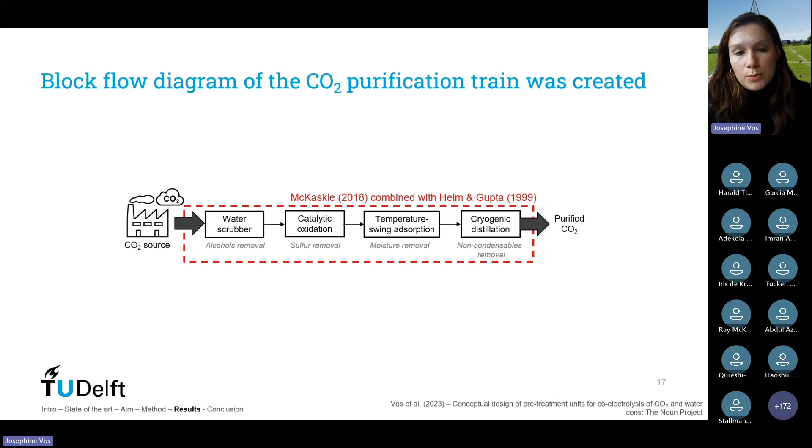This train was modeled in Aspen Plus, and already 5 main units are needed to reach this ppb level. First there's the water purification, the water scrubber unit and regeneration tower. Then in the sulfur removal section, a catalytic oxidation unit turns the sulfur components into SO2, which is later washed out using an aqueous solution of sodium sulfide, removing the nitrogen dioxide and sulfur dioxide simultaneously. After that, I remove traces of moisture using temperature swing adsorption, then move on to the non-condensables removal section.

What we found is that it's actually possible to reach these purity limits, a purity limit of parts per billion per contaminant, using this purification train. The only trace impurities left were water, carbon monoxide, methane, and argon. Despite initial recycling efforts, at this moment still 10% of the CO2 inlet stream is being lost.

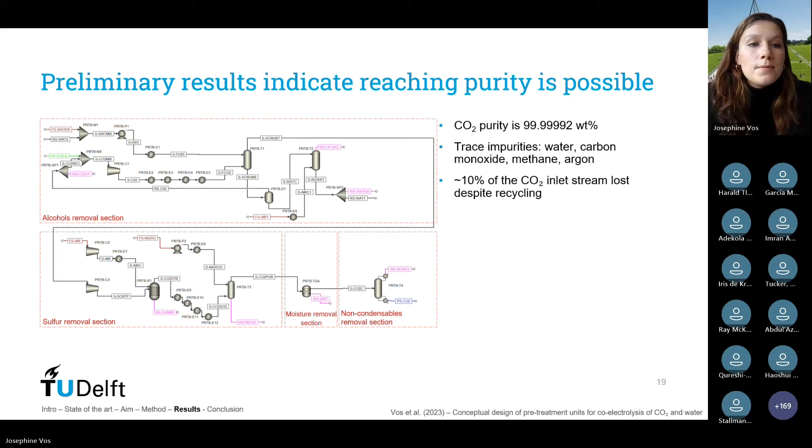If we look at preliminary cost calculations - these are not the final numbers, just an indication - the bare equipment cost for this train, for all these units, is about €100 per ton, mostly related to the sulfur removal and alcohol removal sections. If we look at the energy costs, they're around €570 per ton, mostly due to removal of non-condensable gases from the cryogenic distillation step.

I'd like to point out these are preliminary numbers, and I'm currently still working on the temperature swing adsorption unit, so this hasn't yet been included. I'm working on creating a model in Aspen Adsorption. Also, no heat integration was included yet, and perhaps the operation of the cryogenic distillation tower could be further improved.

But even with these initial numbers, it's interesting to see that previous techno-economic assessments looking at overall plant costs assume CO2 costs will lie between €0 and €70 per ton. If we look at these initial numbers, they're perhaps more in the order of magnitude of direct air capture, which is around €600 per ton - at least an order of magnitude higher than previous techno-economic assessments.

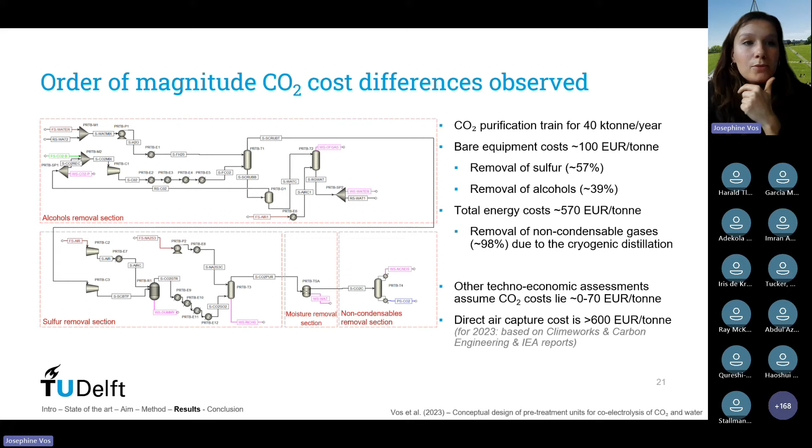What I hope you take away from this presentation is that for carbon capture and utilization technologies, the purification might be different than for transport and storage - it could be more stringent. Also, if we look at the preliminary cost estimations, perhaps they will be an order of magnitude higher than the CO2 costs previously thought, if this stringent level of purification is included.

Since this CO2 cost is so important for the overall performance of future CCU plants, the purification level that is required could affect the overall business case. As I was already saying, this is work in progress - I'm currently still working on the temperature swing adsorption units, also working on improving the CO2 loss by recycling more CO2, and including heat integration.

If you would like to hear more, my research is part of 2 projects in which we look at CO2 electrolysis at different levels. You can feel free to reach out to me via email or LinkedIn.

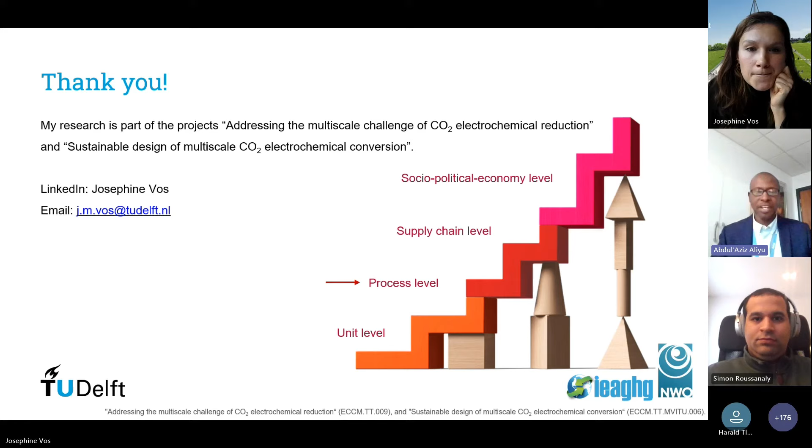Thank you, Josephine, for sharing the outcome of your research with us. Very interesting - it appears you're doing a lot of work. So thank you for sharing such data with us.

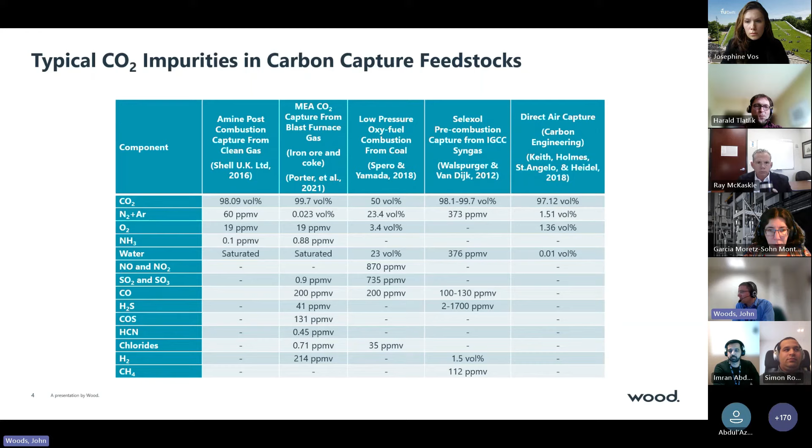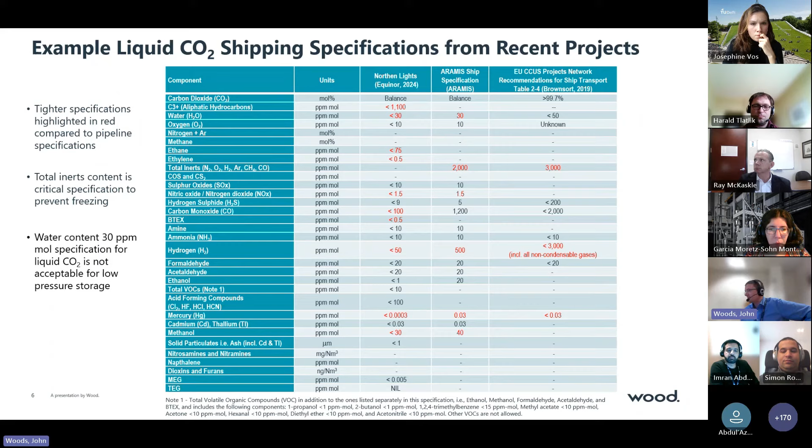With regard to liquid CO2 shipping, obviously because of the cryogenic nature of the CO2 product, there are a lot more stringent specifications compared to pipeline specs. The specifications indicated in red are generally tighter for liquid CO2 compared to pipeline CO2. I noticed, with Northern Lights, we've had a very recently updated specification for their medium pressure liquid CO2 product.

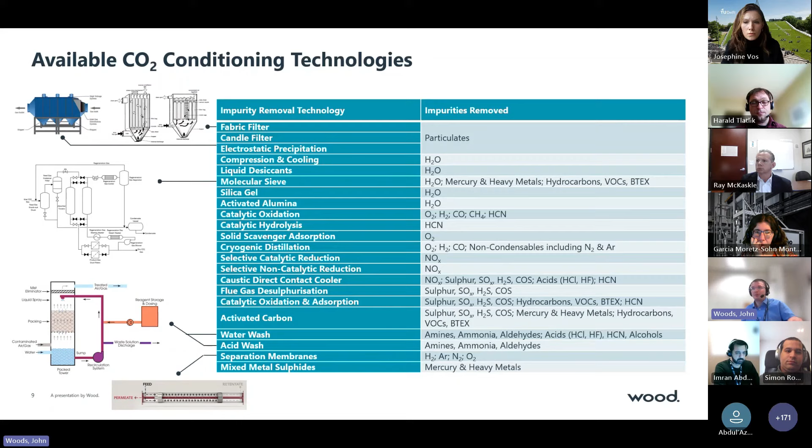Just to show you an example of how complicated the purification unit can get, one reference here is from the Callide Oxyfuel project, which was basically oxycombustion of coal. It was using Air Liquide's cryo cold box design, and it was their precursor to what is now available as their Cryocap Oxy technology, which is being considered for the Milaki cement plant as part of Project Olympus, with Holcim. So it's a process that is definitely being considered and is going to be used for CO2 capture for some of the plants in Greece.

So here, for example, we have caustic scrubbing, we have the particulate filters, we have the wet gas compression and water knockout, we have chilled water scrubbing, we have the dehydration beds, and then the cold box with the heat exchangers and a separate denox column and a liquefier here, because this is producing a liquid CO2 product. But equally, the process can also produce a vapor phase CO2 product as well, if it was going to be compressed and sent via pipeline instead of being liquefied for transport.

So just having a look at oxygen, for example, we mentioned about the 10 ppm oxygen specification that is mainly considered. Now, there are several different ways that you can take out oxygen, as we've identified already. For something that's nice and clean, like natural gas turbines, where it's been captured by an amine system, generally it's a very low oxygen level, but it's more than 10 ppm. It may be 20 to 30 ppm oxygen.

And if you place it directly on the outlet of the compressor, you have the heat that you need for the catalyst to work, and generally that seems to be quite well suited for a very low oxygen level where you only need to remove sort of tens of ppm. Also, instead of hydrogen, if there's methane in the stream, or even if there's hydrogen in the stream already, they can basically co-react with the oxygen to convert to water and CO2.

But of course, this is more challenging when you consider the volume of catalyst that you need. If you've got a CO2 stream that has maybe 500, maybe 1, 2, 5 volume % oxygen in it, you would end up with extremely large bed sizes, and the cost of the platinum catalyst is very, very prohibitive.

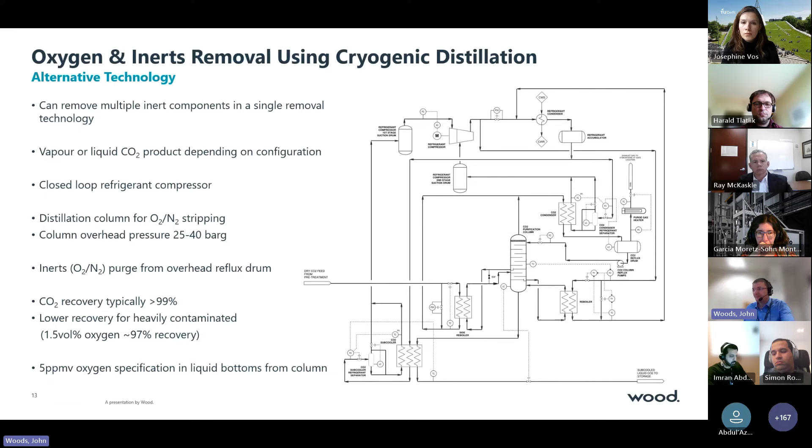But the other consideration as well, why you might go for distillation over catalytic oxidation, is because maybe your stream is also co-contaminated with nitrogen, and the nitrogen might be at such a high percentage that it makes more sense to just remove multiple inert components together, all out with a cryogenic distillation process, rather than doing catalytic oxidation. And very similar with the operating cost, we see that in that sort of range around the 600 ppm mark is where you see the crossover point where the operating costs match.

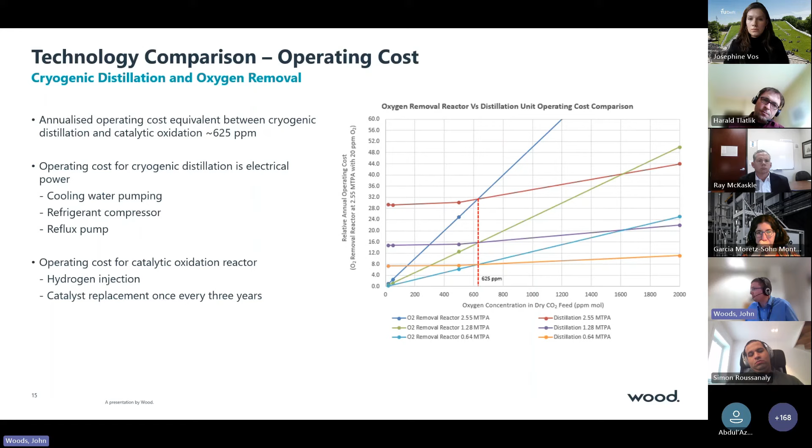So in conclusion, impurities do have to be removed, and the specifications are set obviously because of efficiency losses, damage to equipment, hazardous environments, corrosion. The current CO2 specifications that have been proposed in certain areas are extremely tight, and the question is, do they need to be that tight, and why are some of those components so tight as they are? Is it really justified? Has it given us a headache, which actually is going to increase the cost? We talked about safety. The question is, how safe do we really need to be with these processes?

Variability in CO2 contaminants is wide. Generally speaking, particulate removal, sulfur removal, dehydration, mercury removal, oxygen removal, they're quite well defined. Acids, alcohols, amines, ammonia is very easy to remove with water washes. What we've got to try and do here is limit the number of separate processing steps, basically group contaminants that need to be removed and consider the minimum number of separate processing steps you need in order to make it happen.

In terms of where the gaps in the current knowledge are, we see heavily contaminated CO2 streams. There's not a lot of experience with them yet. Use of specialist absorbents and catalysts. With regard to hydrocarbons and BTEX and VOCs, which components in VOCs are present and how are they removed? In the cement industry, they do have VOCs present in the CO2, for example, and what type of VOCs are they, and how do we remove them? These are areas that need further work.